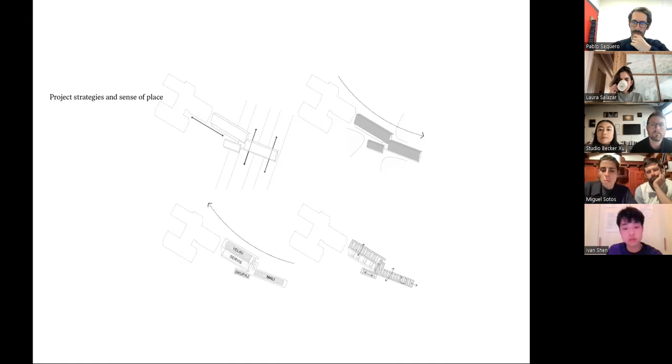In order to engage with the community and understand how things work there—since for us it's a foreign country—we had to ask how to intervene here with sensitivity, and really understand the conditioning issues and cultural elements. That's not easy at the beginning. You can try to read, but Slovenian is a language that's impossible to understand, even when you're in a meeting trying to follow along. It's been a huge process trying to communicate with the other team, the authorities, and especially the engineers, who are very hard to deal with.

So this first strategy: in this alpine region you have different elements and typologies that are always organized in threes, arranged to create an intermediate space meant for gathering for the community. There are strong identity elements that help incorporate into the project, so people there could understand and feel the building belongs to them—not imposing a new element, but creating something they already recognize.

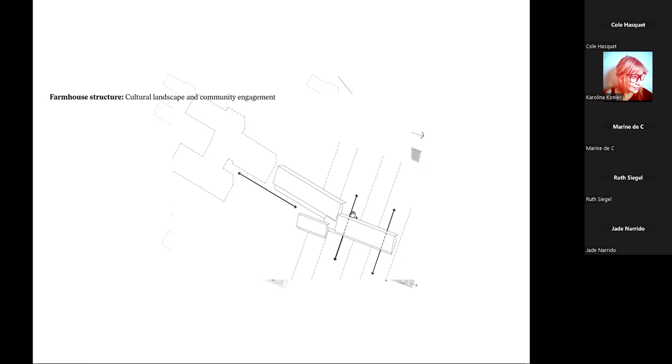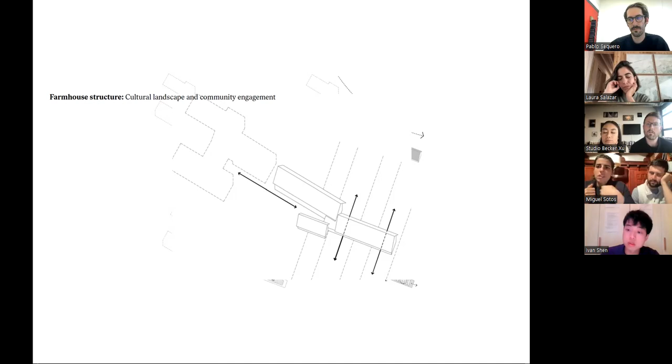With this structure of three buildings, we could connect with the existing school and organize the program we had. There was a third element, the smallest house, which is the gym—this wasn't actually in the competition, it was something we added extra. We think that helped us win, or at least was really positive when we talked to them, because it was a multi-purpose space just for the community. It's about how you connect a new building with the existing community—this was an extra thing we added to improve the program.

This is a model that always helps us understand the project better, and this will be the entrance and also the gathering space where you can join with the rest of the community and kids.

The second element is the 'gank'—a Slovene word meaning balcony, but it's a specific element of traditional architecture. We used this to organize the whole program. We wanted the gank to run all over the building, and except for the cores that have the services—kitchen and bathroom—the rest would be a fluid space, a continuous gank acting as a continuous playground. This also allowed us to connect the south facade to the north facade.

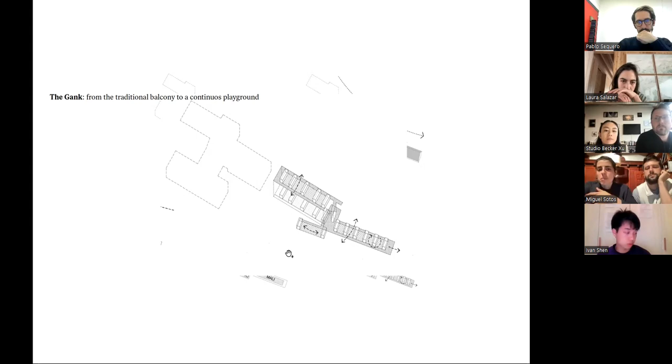This is all open to the southeast, which is the best orientation here, so we could allow the maximum light possible. This is a model where you can see how this works—how the space that distributes the aula is at the same time connected with the cores, and everything could be a playground.

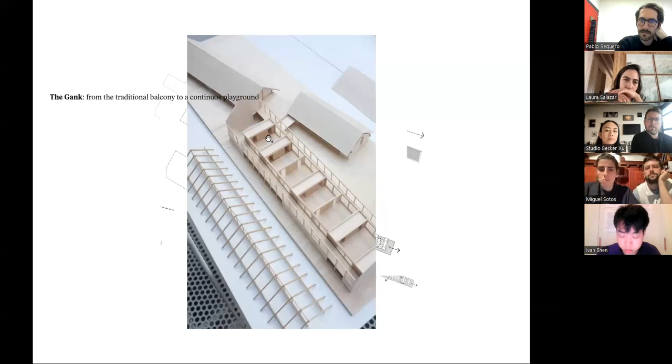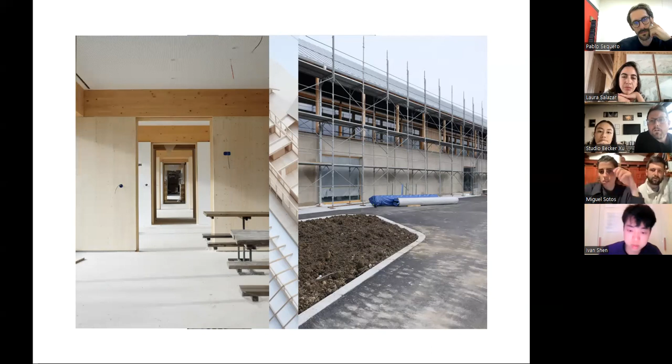The left picture is the aula, before the doors. These are progress pictures—you see the upper balcony, which is the more modern gank, and the lower level, which is more of a service part, with kitchens, open to the north side. Everything is a succession of continuous space.

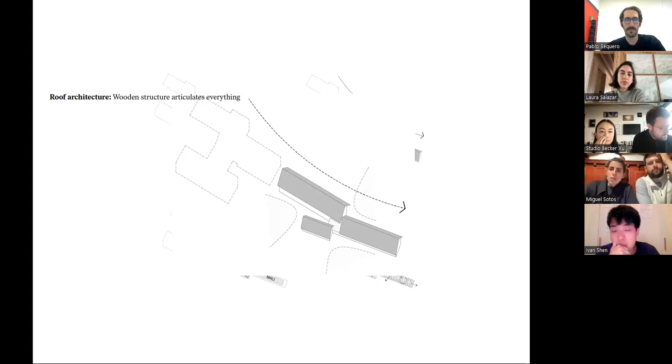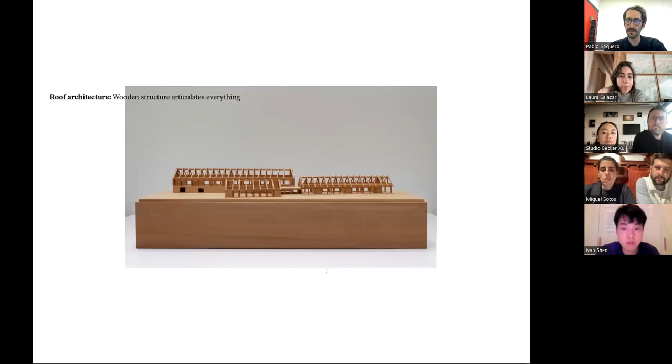These linear elements are found everywhere in the landscape—it's really impressive how well done they are, and they maintain and still use them today. We took that and tried to use it for the building ourselves, as the element that organized all the space and structure, with only one kind of truss. Even though the three buildings have the same structure, it's just a repetitive element.

This is a bit funny because we first had one engineer, and we had all the calculations almost done, but it was more in the execution process. Then in the middle of the execution, the engineer just left—so we had no engineer.

Hi, hi—we're kind of losing you. No, now it's better, you're back. Yeah.

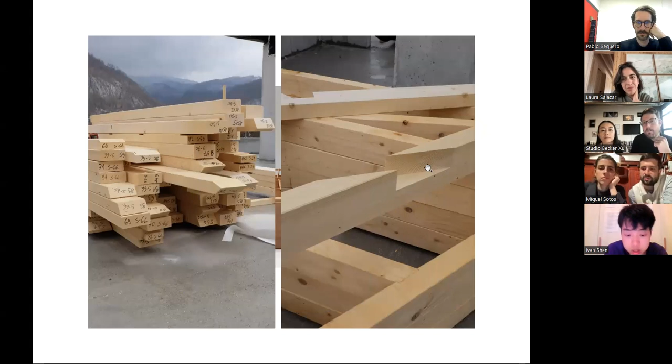But at the end, we had an amazing work from these people. This was surprising but interesting at the same time. There's an interesting thing in this picture: in Slovenia, for centuries they've used this half-lap joinery. They actually redesigned the whole building using this technique, creating the framing with this half-lap here and here. That was beautiful.

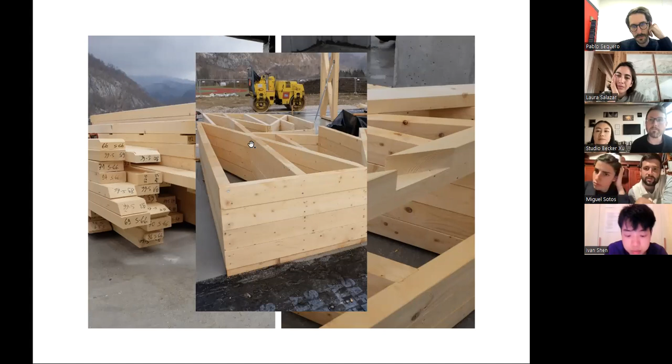When we arrived at the construction site, we found them joining these pieces, and it was really a nice moment. Because suddenly you saw that the construction was getting along with the place, with all the traditional culture. We're really used to thinking that wood is no longer properly done, at least in Spain. So when we got there and saw all this, it was like, wow, at least for us it was quite a thing.

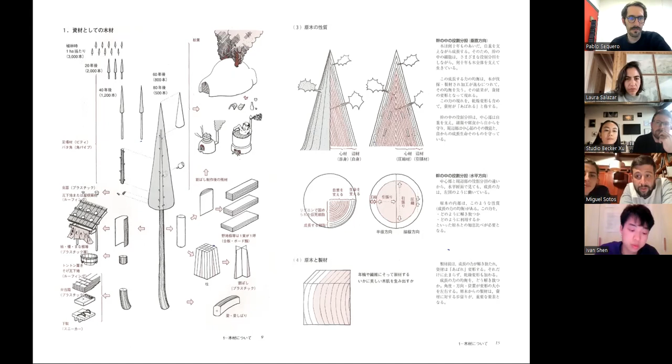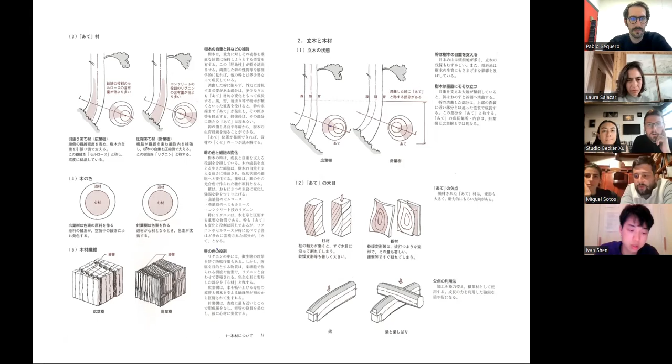It's not only about building in wood, but actually knowing specifically which piece of the tree has which purpose, how all this wood can be used in certain areas, how trees grow, where their strengths are, how you can use a beam as an arc, or use a couple of beams as a supporting point, how you can use the inner structure of the tree to fulfill your intentions or build more accordingly to its nature. How you can cut it, dry it, how it's going to change shape with time and with the drying process.

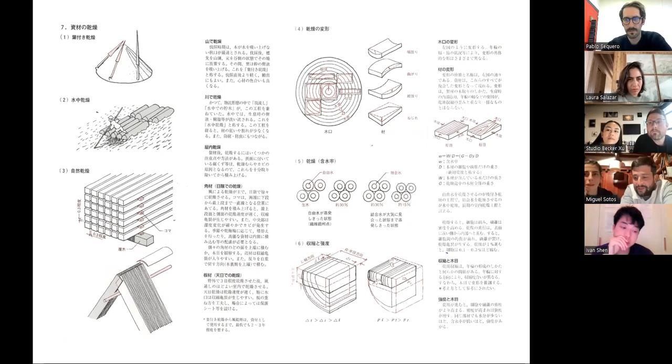I took this from a really beautiful book. Japanese also have this tradition of drawing everything really nicely. All these, for example, this is really beautiful as well, how you cut, how the wood has an orientation in the inner structure of the tree that can be used in a structure. This is really wise and really beautiful.

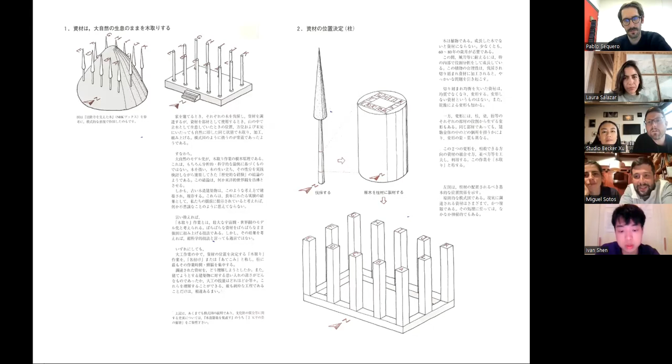It's really difficult nowadays because they cut all the trees like that, and hardly anyone can identify the wood. But I want to go fast on this.

This drawing I really like because the carpenter has this main idea: you sit there just in front of the plan, and then somehow in your mind all these beams fly around, and you start to realize how you're going to build something and which piece is going to be in a specific place. They have this tradition and many drawings about the whole family of joinery. So these efforts, these hands, express it beautifully, how everything works in compression.

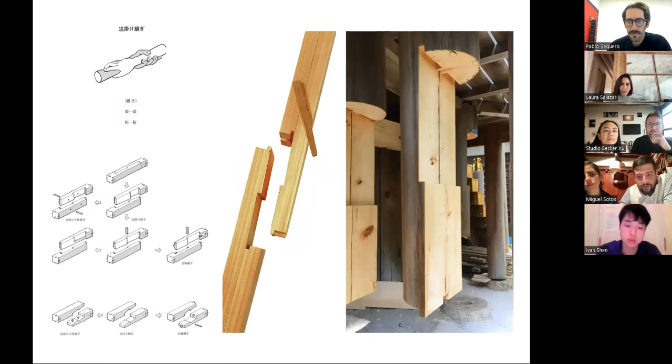This is something that really changed my mind, and it was really difficult to try to do it here in Spain. But I learned the techniques, how you sharpen the tools, how you do this kind of joinery, how you arrive at this kind of precision and accuracy.

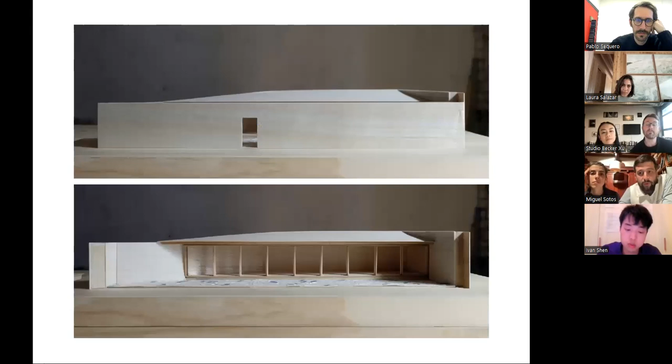When we went back to Madrid, somehow this plot that we designed in a really different way, we thought maybe it could be a pavilion. This was really catchy to the client because we told them, if you choose one beam and one pillar and multiply it so many times, then you have the cheapest structure possible. They were like, oh right, so I'm saving a lot of money. It's not going to be that big, the house, but actually I'm going to save a lot.

In the village nearby there was a really nice carpenter. Now he's a friend, but he's a craftsman who did all the work on the house with us. We collaborated and did some part of the carpentry work, and we made 150 models, because these allowed us to organize ourselves and try to find the dimensions. Each model has a purpose, to find the specific dimensions on the project and find solutions for the structure.

We were trying to find the solution for the eave, so we made this model specifically to see the cuts in the beams and how they support themselves. So we did this project.

The structure, the beams and pillars, was really useful because it allowed us to establish a module, and this module helped us create so many related things, like double rafters for the floor structure and main rafters for the roof structure. So with this module, everything became the motif for the whole project, which was quite beautiful and at the same time quite challenging, because everything had to fit this pattern.

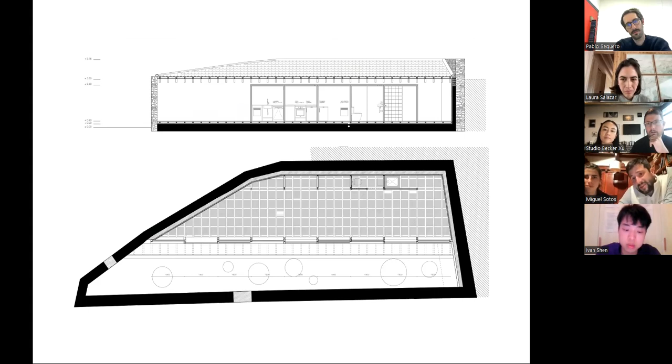It's not Japan, but it's Segovia. We found this carpenter who was using joinery he learned from his father and the whole guild that worked here. It was more basic, but we could at least introduce some of the local elements, and we could transport it by truck, which was really nice — at some point we were behind the truck, following it, going to the place, and the whole house was traveling there. It was really beautiful to see.

There's a lot of advantages to always working with wood, and this is one of them. It was beautiful to be present there, traveling there, and one thing that was even more beautiful is that they built it in 1.5 days, which was really nice.

They just arrived, moved everything in, and started with the screws, preparing everything in their own way. And they built the entire structure.

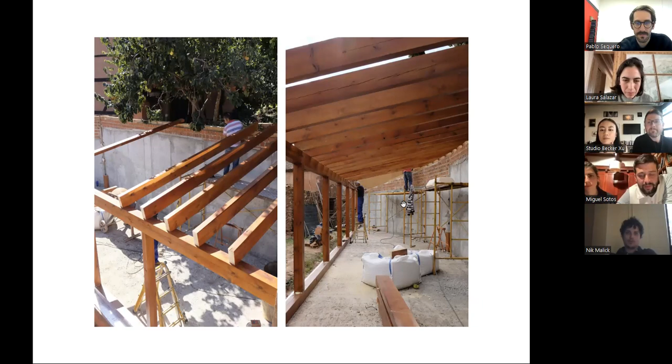We had to do a foundation, because all the walls you saw previously were in terrible condition, and we needed it to sustain the surrounding structure. Once we had the main structure, we had to find solutions for a lot of details.

There are many things here. It looks simple, but it's actually years of work. If you look carefully, there's solid wood that is going to be seen, and solid wood here that is going to be seen too, but there's also this panel, and this rafter collaborating with the beam. There are so many details in here.

The flooring is aligned with the bottom beam, and also with the glass, so there's a complete direct connection between the inner part and the outside part. These double rafters also allow you to put electricity down, running into the middle of the room.

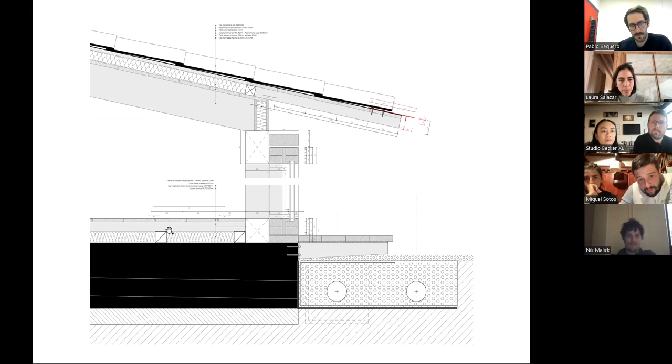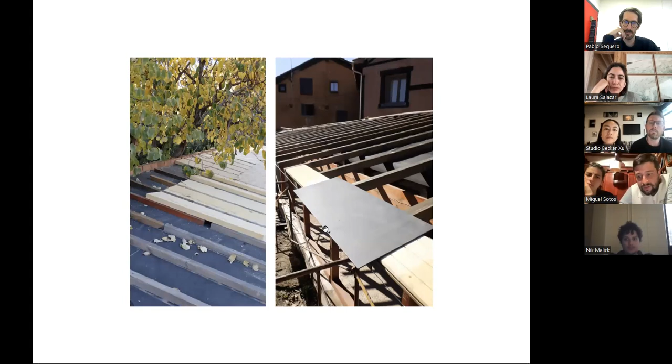There are so many details, and also these kinds of solutions - it wasn't neat at first, but these rafters collaborating with the beam, using long rafters, allow us to have a longer eave. This steel plate lets us use ceramic tiles, which is required by regulation in the area, while keeping a completely straight line at the end of the eave. So we crafted these small details and built the roof structure as best as we could.

This is just after we installed the ceramic tiles, with the line that we created. Then we had to design the inner structure, the partitions for the small program. The house is completely open to the garden and is only one room, but has small partitions for the kitchen and bathroom. We had to measure the dimensions, the height, and the relationship with existing walls.

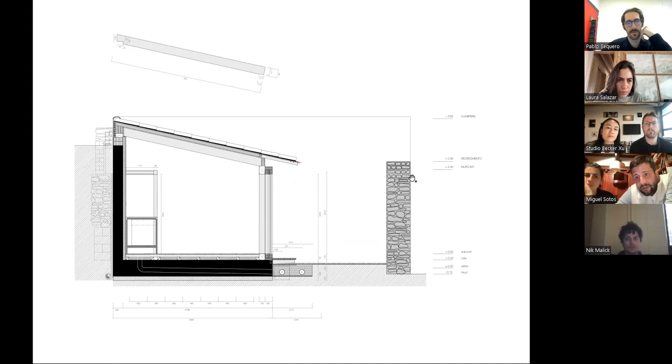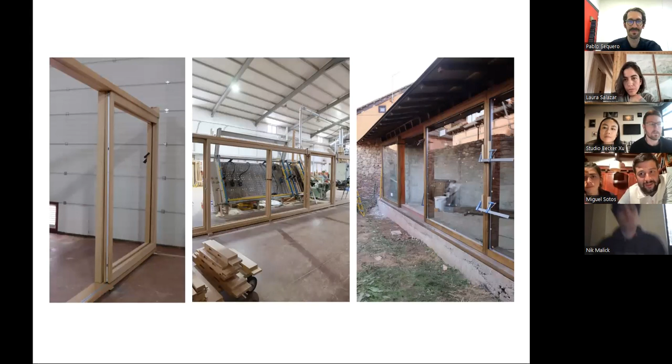We went back to the workshop with another craftsman, also nearby. It's quite strange how you can't find a craftsman in Madrid, but 100 kilometers away there are, I don't know, 20 of them, and really good ones.

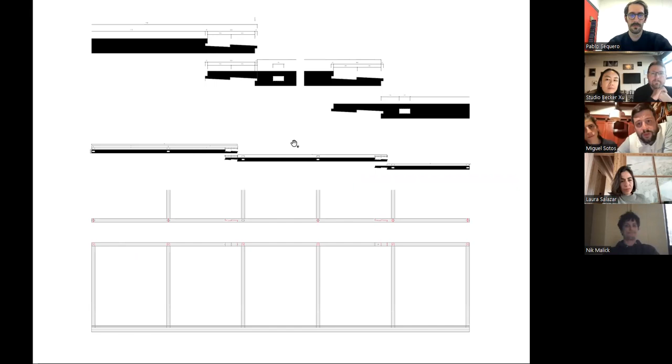This shows that if you have enough patience, it's still possible to build this way, or at least a small part of it. These are the plans of the inner partitions, which we could build without a single screw.

Just to finish, I wanted to say briefly that we titled the lecture or presentation 'in the making.' For us it's an expression without a specific translation in Spanish, but it's kind of a tricky phrase - it means staying in a process, but also how you are involved in that process, and how you are making and being made at the same time.

So we like this idea of trying to develop your own architecture, or being involved in the process of doing architecture, could at the same time be an evolution for yourself, not trying to find a specific outcome of 'I want to do this or that.' It's more like a process. In the process of 5 years, you achieve some kind of knowledge, and with that you're able to work in a more precise way. I believe you need time to gain expertise in what you do to arrive at a better outcome. So, well, that's it. I hope we're not too late.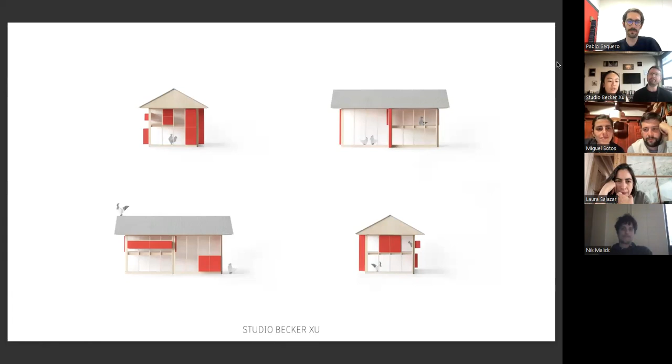Something in the design process that we found kind of strange, but also compelling, was the ambiguous scale of the coop. We were constantly designing something that was too big to be an object, but also too small to be a building. So I would say, even though from one perspective, we designed it to be a very utilitarian house for the chickens from within, we're also interested in how the coop could be viewed and experienced as a sort of sculpture that you engage with in the round, and in sort of designing that perception you have of it when walking around it.

So this was the same model that was photographed before, but we kind of wanted to see it in a new way.

This project that we thought would actually be a very simple structure turned out to have a lot of design constraints. We realized pretty quickly that chickens are actually very picky clients, but there were super strict restrictions on the shape and size of the various elements and functions that they needed to serve.

So we were kind of faced with this challenge of maximizing the design effect with limited means of intervention. A lot of the design had to come through just subtle plays in proportion and composition. Color obviously also played a very important role for us in synthesizing this collection of parts. And so we thought of the coop kind of as this Swiss Army knife, where different moments of utility are all composed on a single armature.

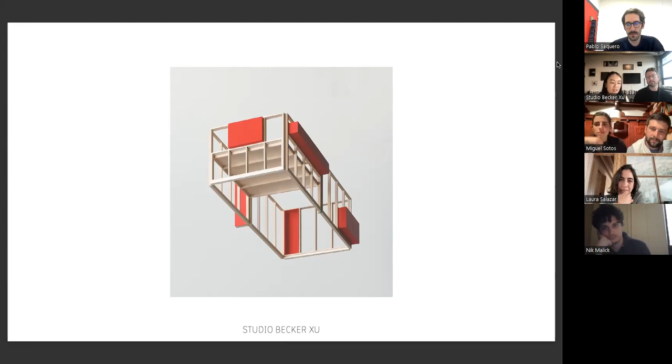Part of the client's vision for the coop was to be a project that they could build together with us and also with their family.

Ultimately, I think it was a very unique experience for us designing for chickens as one of our first projects, because they were clients that couldn't really communicate back to us. And I think that's something that both of us as young designers, like that kind of communication between client and architect, is something we're still learning to navigate in a lot of ways. This project really forced us to take a very empathetic perspective of anticipating the user's needs when they weren't able to communicate it to us themselves.

So shifting now to an unbuilt project, but at the human scale. Recently we were shortlisted to participate in a competition to reimagine missing middle infill housing here in Chicago. The competition, which resulted in an exhibition, we were really interested in focusing on the 2-flat, which is a building typology that's very quintessentially Chicago. I think they make up about a third of the total housing stock here in Chicago, so they're very prolific across all of the neighborhoods here.

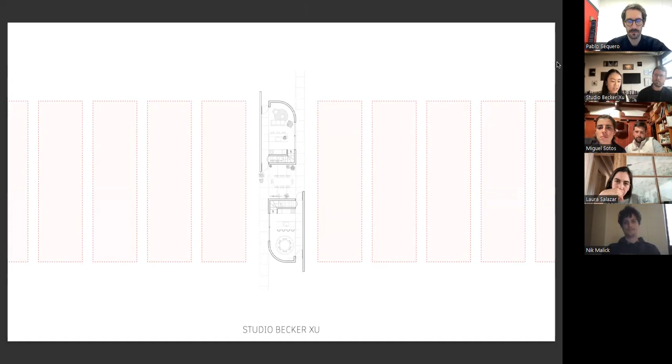One of the other things our design was a reaction to was our perception of the lack of open space in the city. The standard Chicago lot is really long and narrow, about 125 feet. So we saw an opportunity there with the elongated proportions to insert open space in the middle of the lot, and at the same time also expanding these kind of corridors, very narrow alleyways. They're called gangways here, but they're very narrow and underutilized.

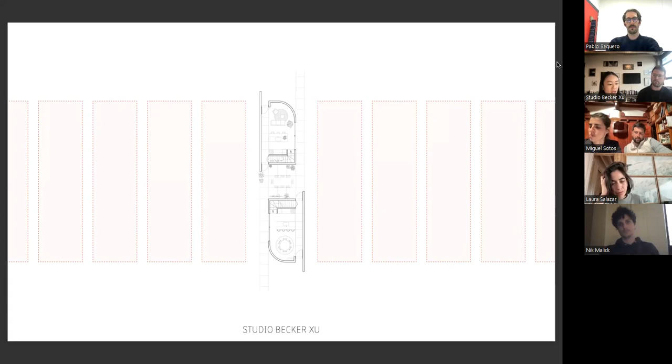Usually between lots, we expanded those to become more accessible pathways. At the same time, we minimized the building footprint so that it was within about 50% of the actual buildable area on the lot within the setbacks. And then we broke up the first floor into these two parts to create a shared open space at the middle of the site.

One of the things about the traditional 2-flat is that the stacked configuration means that one unit is elevated and removed from the street, which really creates this kind of lack of equal access and identity for the two cohabitants. So our design reorganizes the two units back to back so that there's equal access from the front, from the ground floor. There have also been these changing regulations here in Chicago that allow accessory dwelling units now in certain neighborhoods, so it's this additional structure on the site.

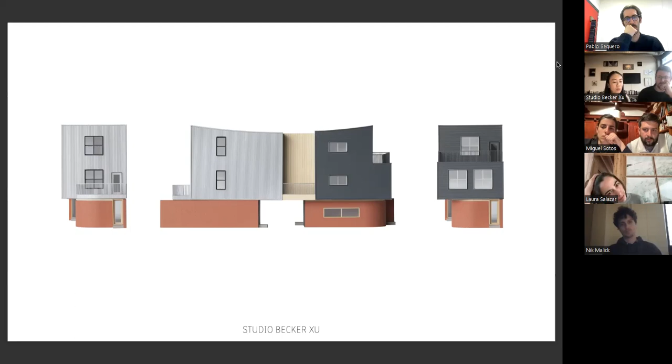With that, the back alley of these lots, which historically has been a very underutilized back of house space, has become a second front and a sort of new public space for the city. So instead of privileging one face, we designed the home to have two distinct fronts, one that's alley facing and one that's street facing.

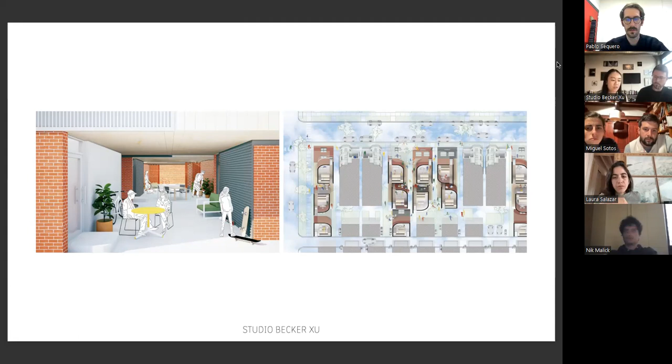Even though the competition was, we were only really tasked with thinking about the design of a single private residence, we saw it as an opportunity to also imagine new forms of community through these shared outdoor spaces that we were proposing. On the left is an image of that kind of chain of covered porches, and the bird's eye view on the right was for us a way of showcasing and seeing the potential interactions at the neighborhood scale, imagining how the aggregation of this new typology of 2-flats could start to produce different scales of open space for a block.

Going a little out of order chronologically, jumping back to the first project of our office, we were given the opportunity to design a home for a family member. It's actually wrapping up construction this month. We just got back this past weekend. It was our first time collaborating on a building project together, so it became a catalyst for us to prototype our own design process.

It was really a humbling experience for us, learning just how difficult and complicated a construction process actually is—navigating cost, availability of materials, and labor, especially during the pandemic, and working with clients who also have specific aesthetic preferences and expectations.

But we were immediately drawn to the natural features on the site. There's a natural clearing on the north end of the property with a pond on one side and an open meadow on the other. We really let the surroundings guide the impetus for the design, and sited the home in the cluster of trees facing these two distinct site conditions.

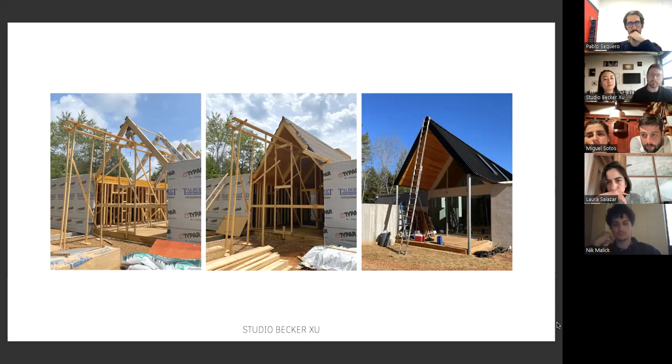It's also been particularly interesting seeing the project through our collaborators' eyes, like our metal fabricator, Leo Gev, who installed all the structural steel for the home. It's just fascinating for us to see into their process and what kind of things they find interesting about the project and also their own work.

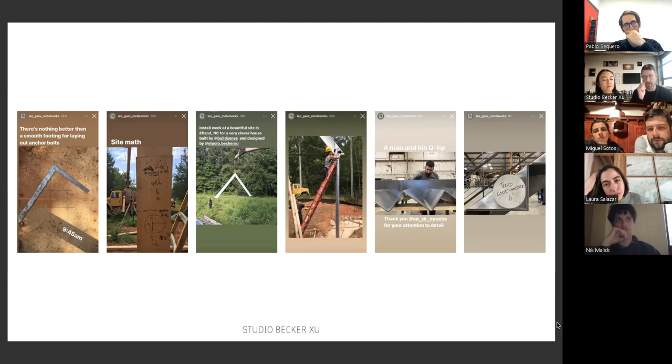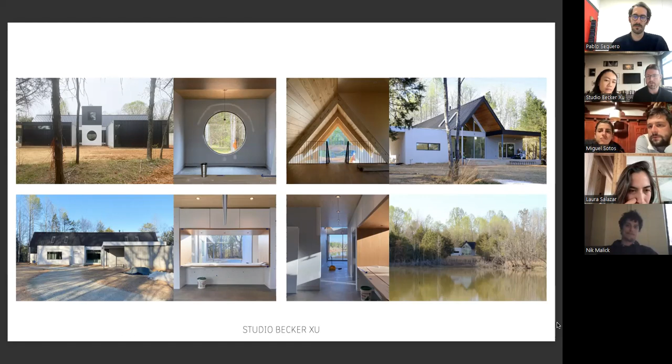Here's some images of the house coming together from this past weekend. In addition to just being a home, we like to think of the house as a device for viewing the landscape that we really try to design both from the inside out and outside in, considering how the landscape is experienced from within the home and also how the house appears as a figure in the landscape.

So throughout the design process, we've had to produce representation for different audiences to communicate different ideas, from quick sketches and diagrams that we pass between just Sharon and myself, to a concept model for the client, to dimension plans for the contractor and permitting, to just observations on the site throughout construction via drone photography.

So this first construction project for us was very much an exercise in how to see.